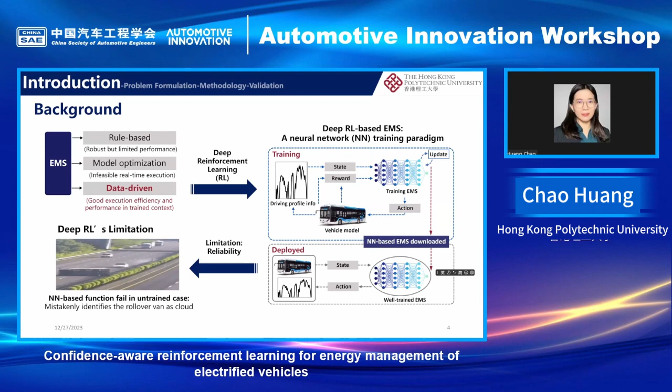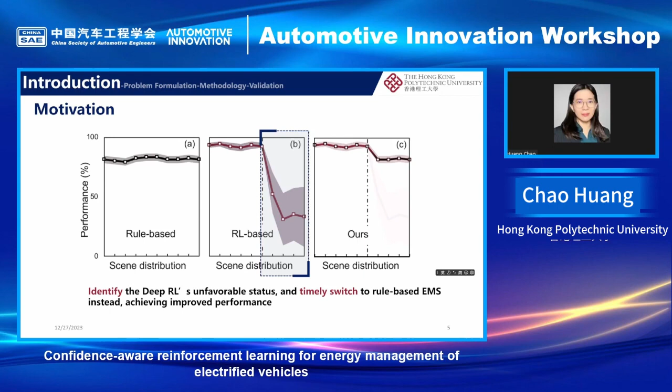However, the performance will degrade rapidly in new ones. Therefore, our idea is to identify when the reinforcement learning strategy is underperforming and switch it to the rule-based strategy. In this way, we can enhance the overall system performance, as shown in the graph on the far right.

With this motivation, our research approach is as follows. First, we modeled the energy management problem of the fuel cell electric vehicle. Then the main part of our work involves developing our method and energy management strategy. We start with the basics of traditional reinforcement learning-based energy management.

Then we introduce our core innovation. The third part involves a knowledge-driven, rule-based strategy to compensate for unreliability in the reinforcement learning approach. Finally, we integrate these steps to form a comprehensive, confidence-aware reinforcement learning energy management strategy. And then we will use simulation validation to demonstrate the effectiveness of our approach.

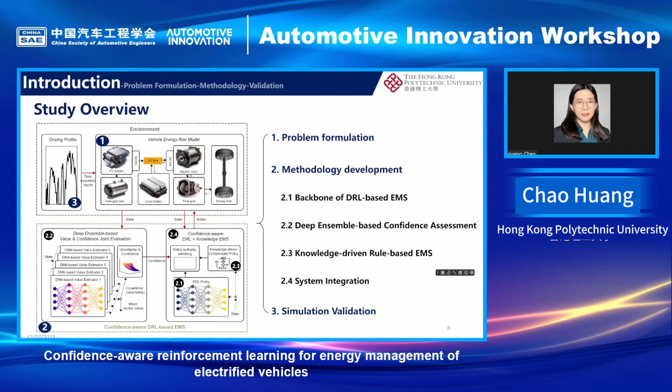So let's give some details. In our model, the vehicle has two primary energy sources: a fuel cell engine converting hydrogen into electrical energy, and a lithium-ion battery system, which we use LIB for short in the following presentation. These systems jointly supply energy to the vehicle.

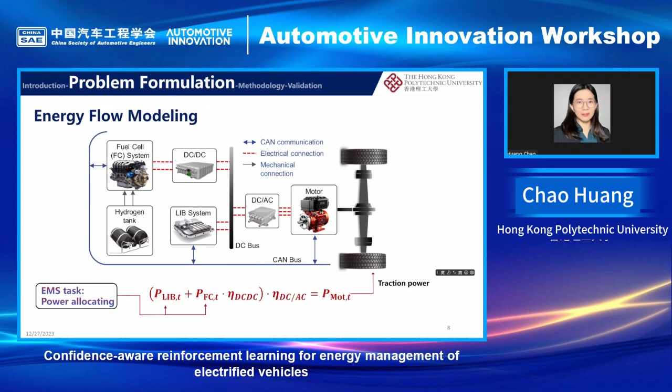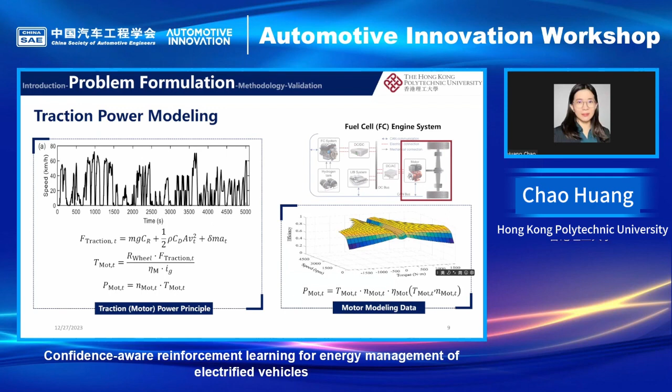After modeling the drive component, we focus on the energy storage aspects, starting with the fuel cell system. It generates electricity through a mix of hydrogen and air, with efficiency directly linked to its output power. We modeled the fuel cell generator based on the numerical fitting of experimental data.

Next, let's examine the other energy storage system, the lithium-ion battery. For accurate modeling, we consider both electrical and aging characteristics. The electrical aspect uses an internal resistance model to calculate voltage and the state of charge changes.

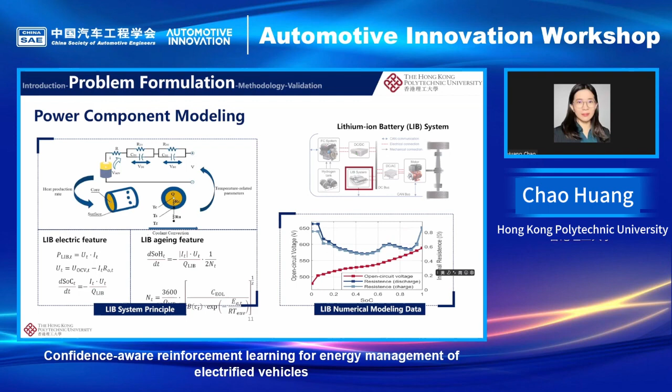With the complete modeling of the system, we now turn to the core of our method. Let's start with the classical reinforcement learning energy management strategy, forming the foundation of our approach. To put it simply, reinforcement learning aims to optimize its action selection principle, or policy function pi, to achieve the highest possible return R.

It uses a value function Q to assess the value of taking an action A in any given state S, essentially evaluating the cumulative future impact of an action through a Bellman equation. The goal of this policy function is always to choose the action with the highest value.

With defined objectives for both the policy and the value functions, the next step is their implementation. In deep reinforcement learning, we approximate these functions using deep neural networks. It can transfer their objectives into neural network loss functions.

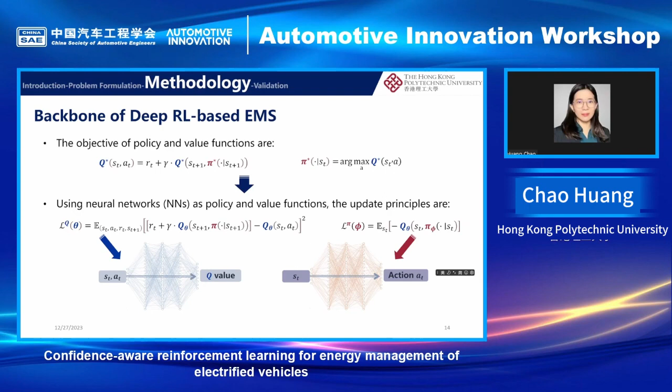Through neural network training, we update the reinforcement learning's policy and value functions. This involves learning from a series of state-action-reward data groups. A challenge arises when the network encounters states not covered in the training data set, which can lead to suboptimal performance.

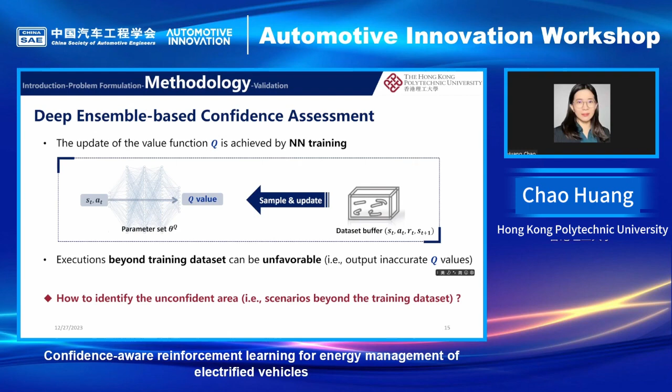So the question then became, how do we identify these low confidence scenarios outside the training set? Our solution is to use a deep ensemble mechanism. We employ multiple independent neural networks to perform the same task. The variance in their outputs measures their confidence level.

For example, with multiple independent networks for the value function Q, we train each with distinct batches from the same database. After training, the variance in response to the same input indicates the uncertainty of the reinforcement learning strategy. We transfer this uncertainty into a confidence measure, which is inversely proportional to the variance multiplied by a coefficient, so a smaller variance among independent models indicates higher confidence.

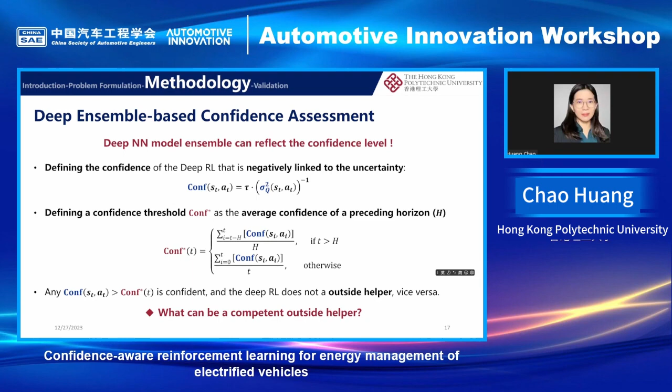We then set a confidence threshold calculated from the average confidence over past time steps. If the confidence for a state-action pair is above this threshold, the RL strategy is considered reliable. If not, external assistance may be necessary. For different problems, this external assistance varies.

In energy management, a rule-based strategy suffices. We design a hysteresis controller focused on battery SOC stability, activating the fuel cell engine to charge the LIB when SOC falls below 40%, and turning it off when it surpasses 60%.

The output power of this fuel cell engine is proportionate to the difference between the current and target SOC. It can prevent overcharging or deep discharging of the LIB. While this rule-based approach isn't optimal, it reliably provides sufficient actions when RL underperforms.

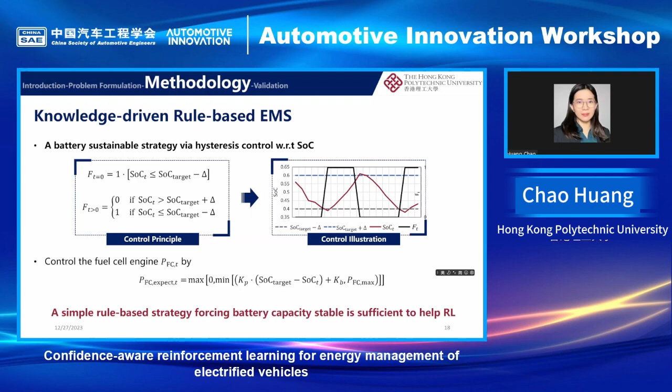With this, we complete the basic framework of our confidence-aware reinforcement learning strategy. Let's explore the specific RL configuration.

The input variables include battery SOC, vehicle acceleration, and the power and rate of change of the fuel cell engine. These variables sufficiently describe the system's current state.

The RL output controls the fuel cell engine's power, continuously variable, allowing a range of power settings. The reward function aims to minimize the total cost of hydrogen fuel consumption and LIB replacement, which also incorporates a soft constraint for the battery SOC against a target value.

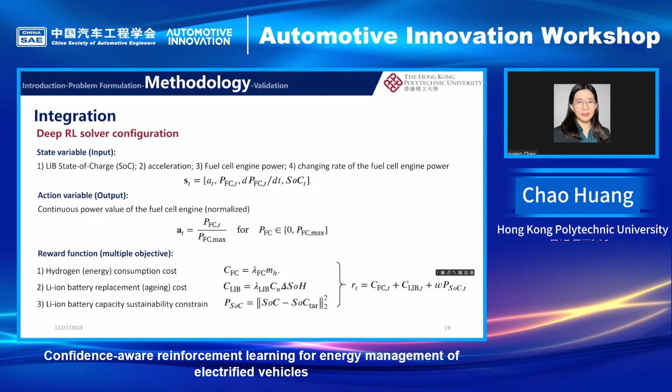Now let's talk about the validation part.

In energy management, vehicle behavior is mainly dictated by driving conditions, represented by the time velocity curves. Our RL strategy is trained under specific driving conditions and then tested in others. We use real-world driving data for training and two standard cycle conditions for testing. Quantitative differences between the training and test conditions, including average speed, speed variance, and stop frequency, highlight the importance of evaluating RL performance under varying conditions.

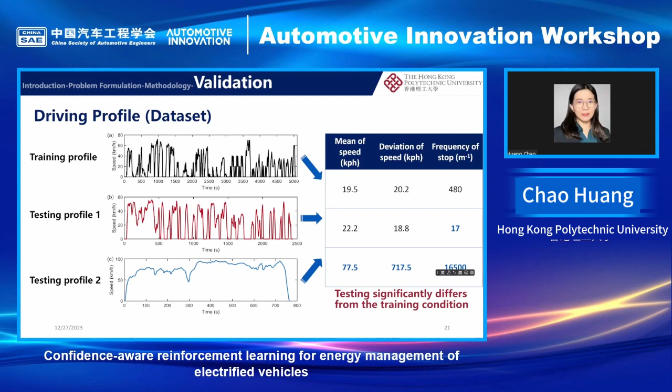To further validate this assessment, we compared vehicle energy consumption, represented by this dark purple bar, across different confidence threshold settings. We see that as thresholds increased from left to right, more low confidence actions were excluded, which results in lower energy consumption on the right. This indicates that actions taken with low confidence indeed lead to poor energy performance, confirming the reliability of our confidence metrics as a tool for strategy switching.

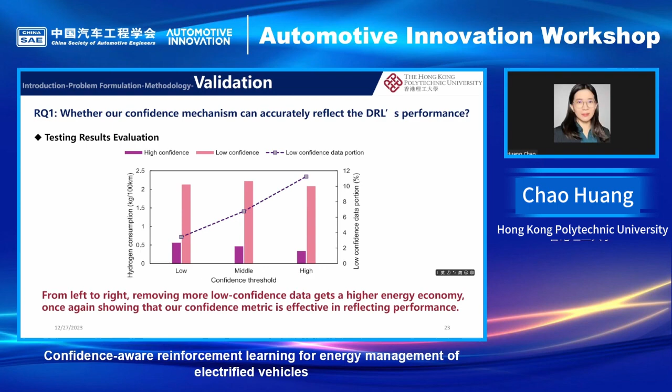The next crucial question is how our confidence-based strategy switching mechanism performs compared to pure RL and rule-based strategies. Focusing first on battery capacity performance, the graph for two test conditions shows SOC changes under different strategies. Our target SOC was 50%, and our strategy maintained it well, with our approach and pure RL showing less fluctuation than the pure rule-based approach, meaning our strategy can successfully achieve battery capacity maintenance.

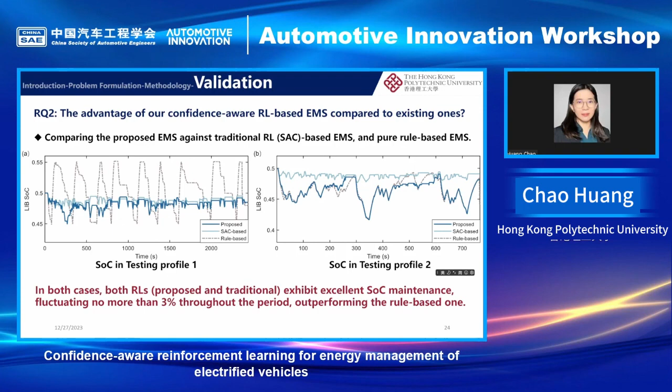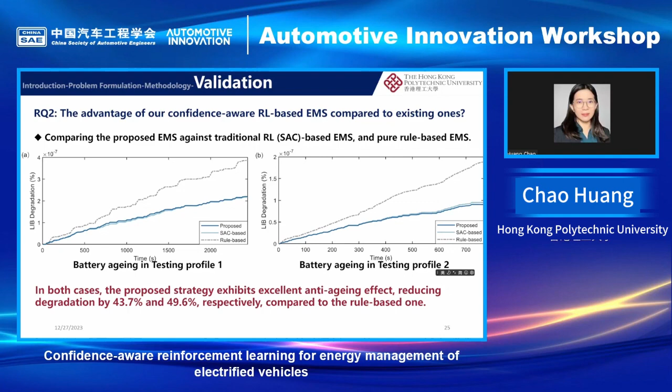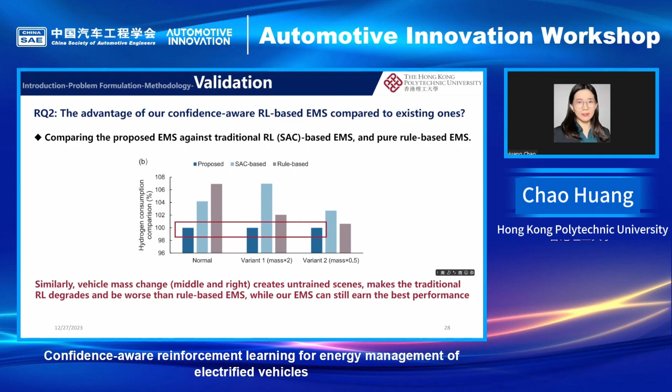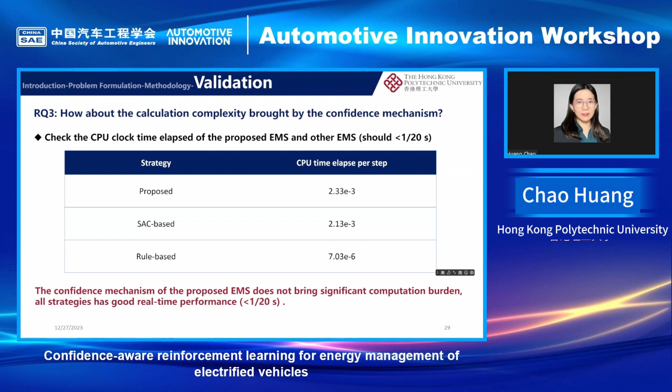Lastly, we assess the computational complexity of our strategy, which involves multiple model ensembles. Comparing CPU time per step, our strategy's computational load is only slightly higher than traditional RL, with millisecond level processing times, which can well meet real-time vehicle operation requirements, meaning our approach is also highly efficient computationally.

So let's go to the conclusion part.

In summary, we introduce a novel confidence-aware reinforcement learning method to enhance the performance of RL-based energy management strategy for electrified vehicles, especially in untrained scenarios. Our confidence-aware mechanism, based on deep model ensembles, demonstrates a 4% improvement in vehicle energy efficiency without compromising other optimization objectives.